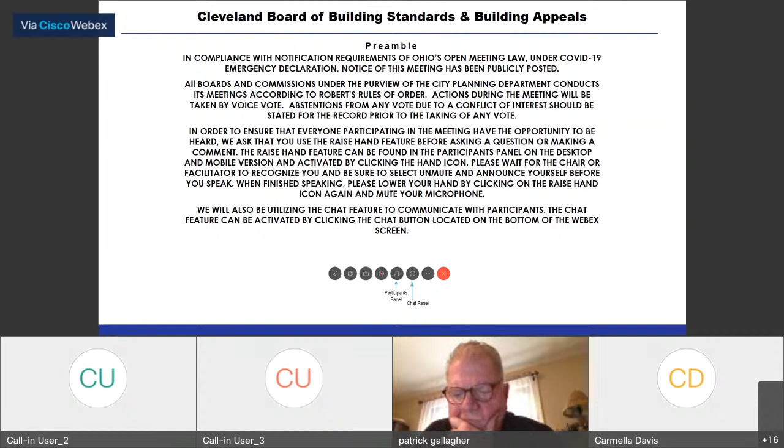Councilman, the very first docket is for the property located at 14620 Lakeshore. Maurice is still working on trying to get those pictures sent through. Yeah, nothing's come through yet. Okay, I put it.

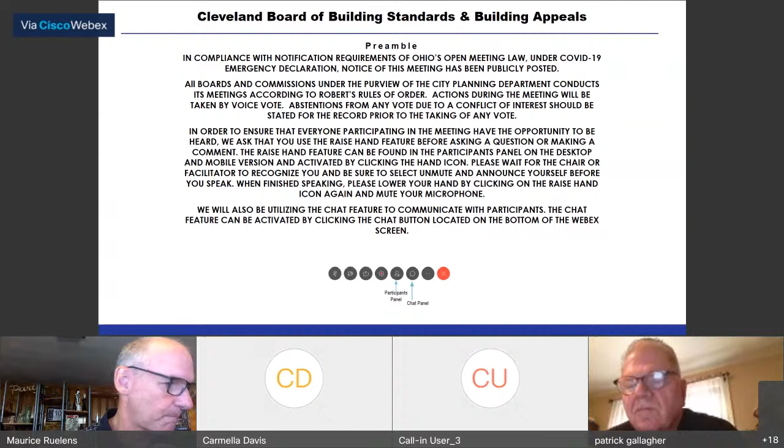James Dorn for Christiana Elridge. And what is your relationship? That's docket A1221. What's your relationship? I'm the attorney for Christiana Elridge. Okay, thank you.

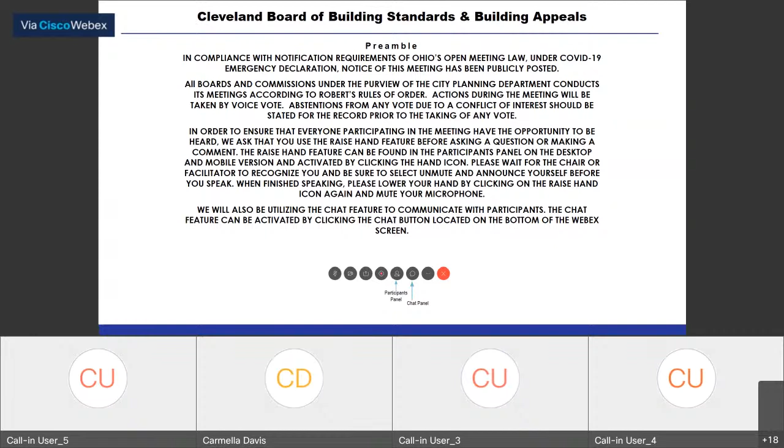And was the councilman the other call-in user? Carmella, this is Lieutenant Alexiak of Cleveland Fire. I'm not calling in, but I'm sharing the screen with Inspector McGowan from Cleveland Fire. Okay, but none of you guys called in on the phone, correct? Correct. All right, so I have one more call-in user that has not identified themselves.

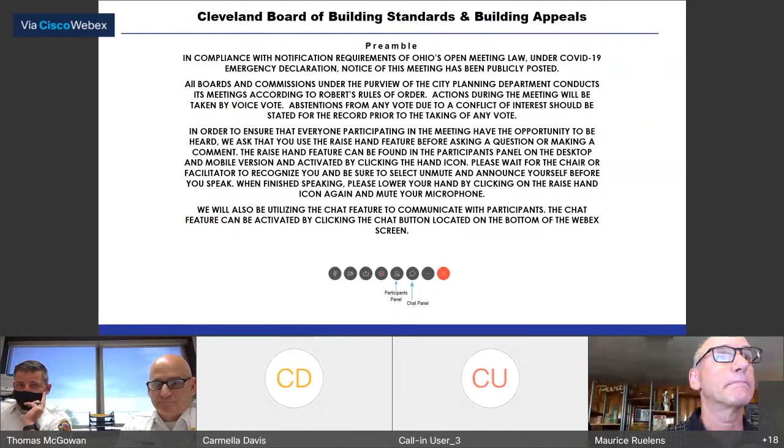That could be Mr. Gallagher. We can go ahead and start, we have all the parties here. Maurice, have you received the PowerPoint presentation or the pictures yet? Not yet, I haven't received the email from him as well. We can start.

Okay, Councilman can comment. We do have pictures for the property as well, submitted by Building and Housing.

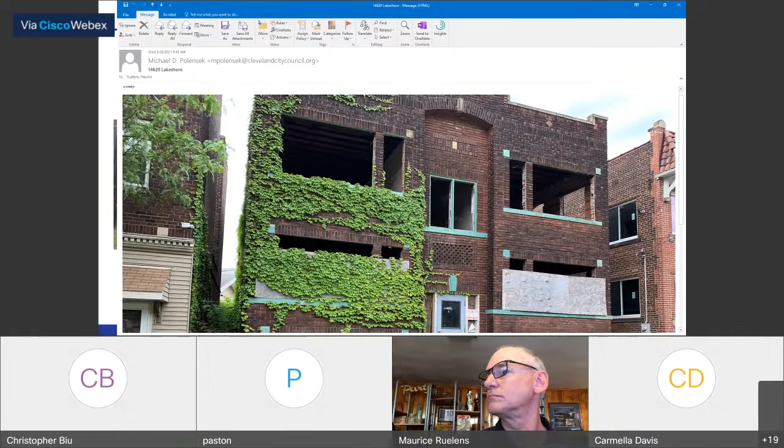This is Patty. Can I ask what that business name is? G3 Management Group, LLC. Thank you. And I also see Anissa Short. Can you unmute your mic, please? Yes, I'm here, can you hear me? We can barely hear you.

Ms. Short, can you hear us? Yes, I can. He's going to have to turn up his volume. We can swear him in. Solemnly swear to tell the truth, the whole truth, and nothing but the truth, so help you God? I do. Yes, okay.

Councilman Polensek, do you wish to speak now, at the end, or sometime in between? At the end, I'll wait to hear the appellants. Okay, so let's hear from the appellant. Who's going to speak on the project?

Are you able to hear me clearly? You're very, very low. Very, very low.

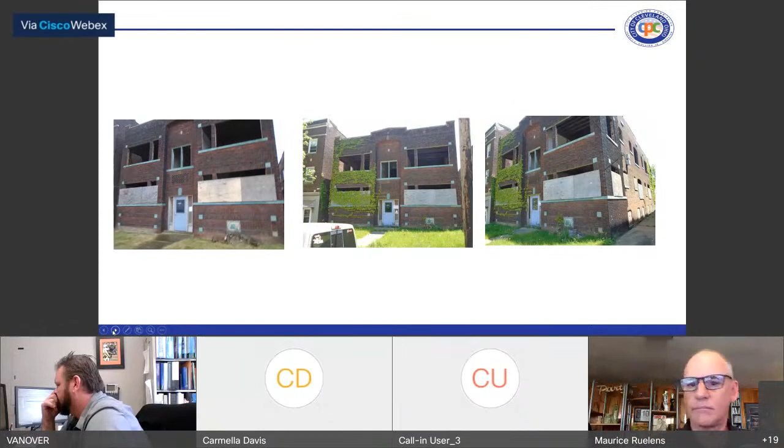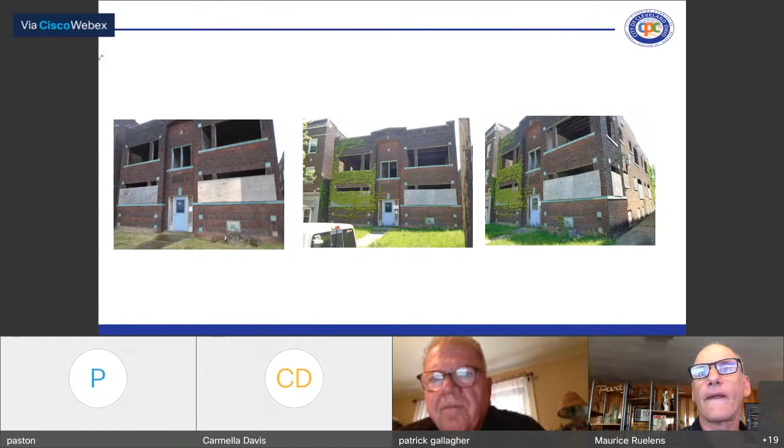We received the violations in February. We purchased the property back in October, I believe we closed. At the time, we didn't have any notice of the violation. We didn't know of any violations. So when we received the violation notice, that's when we started to take action, because we didn't know we had to take any action before then. So right now we're looking for contractors, and we're trying to get the permit pulled, and we're also looking for signs at the moment. So that's what we're planning to do with the property.

I don't know, have any questions? All right, well, we're going to hear from the city, from Mr. Vanover.

Sorry, but we were trying to see if we can request a little bit more time, being that we just found out in February about the violations.

All right, Mr. Vanover. Good morning. So the property was, there was a certificate of disclosure issued as part of this purchase from October 21st of 2020. It indicates on the certificate of disclosure that the property was condemned and when it was condemned. So the purchaser was notified of the condemnation and the violations as part of the purchase.

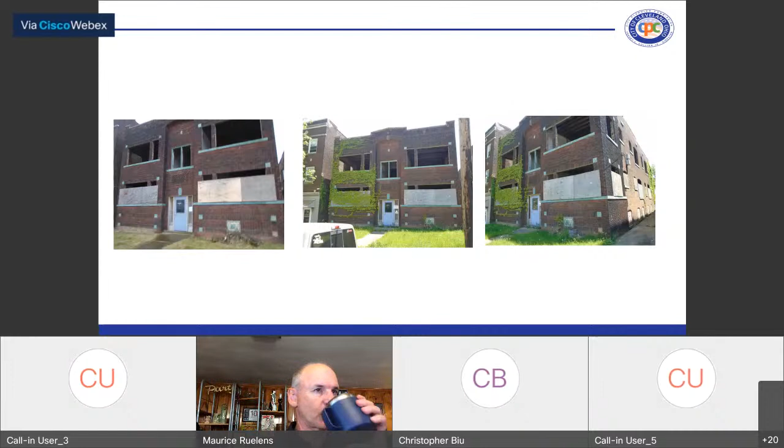Thank you. Mr. Chairman, again to the appellant, do you have the funds to complete this project? Sorry, going to ask you a question, but we didn't receive the certificate of disposition from the title company. We received the certificate of disposition for the first time ever in February. That's the first time us ever seeing anything.

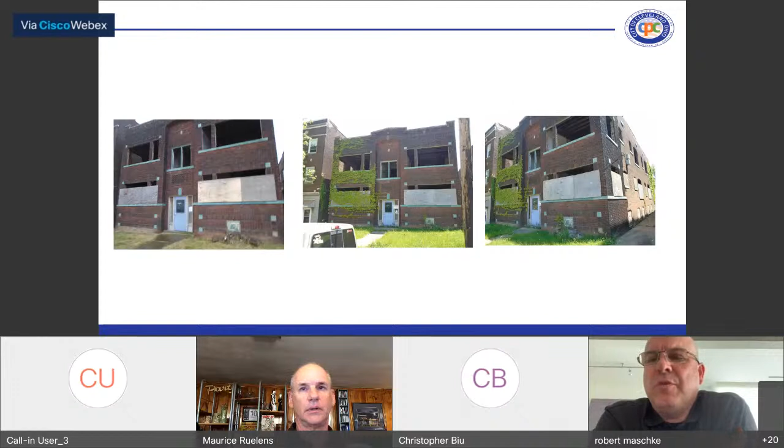That wasn't my question. Do you have the money to do this work? We're looking forward to taking out a loan to complete the work. Okay, based on what I'm hearing, Mr. Chairman, I motion that we remand this to the city. Do not give any more time, and the appellant can work with the city to bring this building out of condemnation.

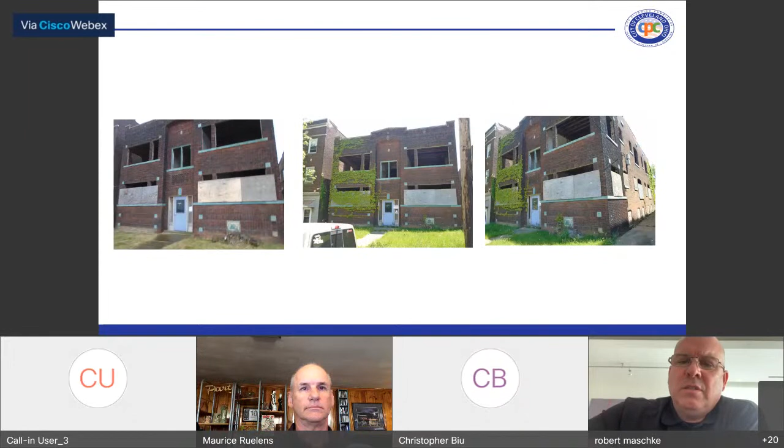Well, okay, I certainly would agree with you. Let's hear from the councilman to see what his view is on this, and then we'll move on with it. Okay, Councilman? Yes, Mr. Chairman and board members and Madam Secretary, and to the appellant as well. This has been a property that has been a cancer on our community. If you see the picture that I sent over this morning, no effort to secure the building.

The grass has not been cut. The backyard is a jungle. I mean, total disrespect for the neighbor. This is on Lakeshore Boulevard, a prominent street in our community. This is a great neighborhood.

We have complained about this building for I don't know how long. That building, if you can see the pictures that I sent over to Maurice, that building has been wide open to the elements like it is for years. That building has been in that condition for years.

But so the appellant buys the building, and again, I concur, there was a certificate of disposition, and what he should be doing is going after the title company or his real estate company if he felt that he had been misled or given false information.

But I'm sick of looking at this mess. The neighborhood's sick of it, and he can't even cut the freaking grass. The grass, look at how high the grass is. No effort at all to maintain this structure. Outrageous. I'm moving. I'm going to do everything I can to get this building torn down. I'm sick of looking at it.

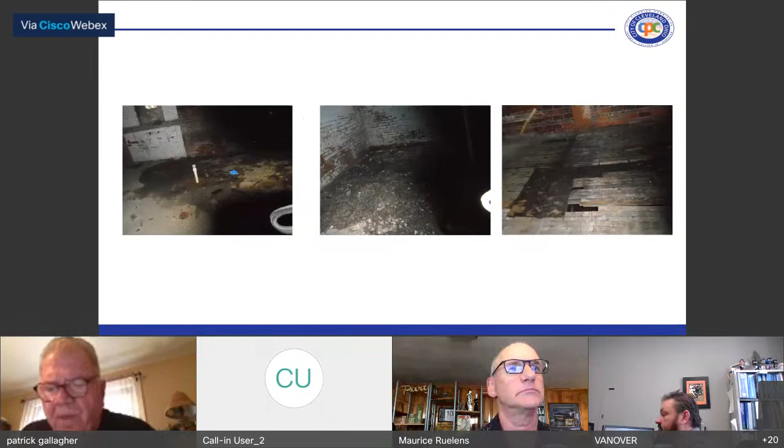Yeah, Mr. Vanover. So, Mr. Chairman, to the appellant, I understand that, and I understand being new to real estate. This is a substantial structure, and my counsel's probably this is not the best one to have started with, or been in your first group of properties. That being said, I've asked twice and still haven't received an answer of how much time is actually being requested.

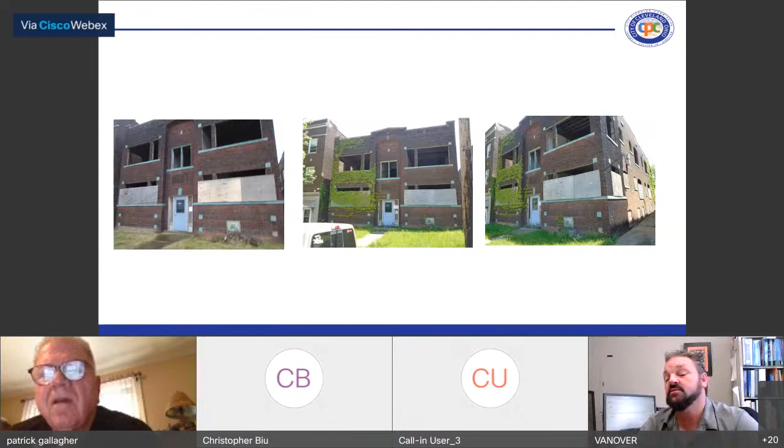Mr. Chairman, to the city, my concern is if this is their first property, this is a very difficult property to turn around if you've never done a project before. And I would be concerned that there has not been an initiative to bring on a professional to help them with documents and submittals, or to coordinate any construction at this point. I have a feeling if we do not remand this back and they work directly with strong oversight from the city, they're going to be back on our docket in 60 days asking for more time.

I totally agree. Mr. Maschke, go ahead and make the motion. One second, Mr. Chairman. Oh, yeah, we do have Ms. Short. I'm sorry. And also Ms. Aston. Okay. Ms. Short. I'm hoping we can hear her.

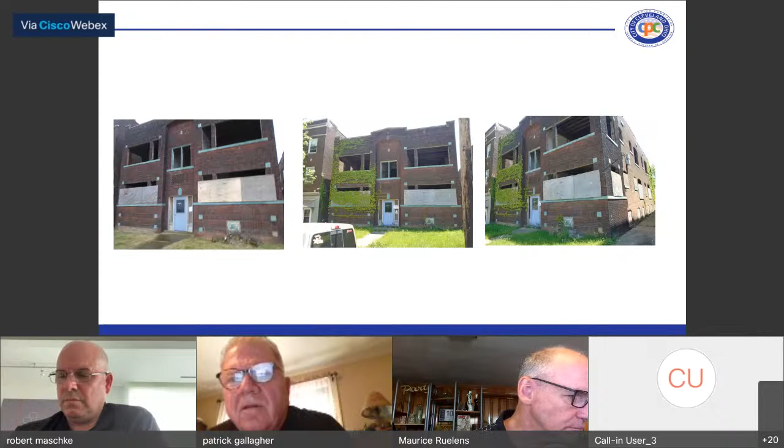Is she still there? Yes, can you hear me? Yes. Is that much better? Yes.

All right, awesome. Like my colleague stated, we apologize for not staying on top of the building. However, we received this information later, not knowing we were under this time strain, and that it was such an eyesore for the community. We called around and contacted people about making repairs and pulling permits, but we didn't know the steps. So we thought this would be the first place to start, as opposed to going forward and doing so much before getting an answer from you guys.

Because when we received the documentation stating it had so many violations and said we had 30 days, this is why we started here. I would like to know, if you remanded it to the city, what is the process after that? What do we need to do, and how would they be helping us with this process? That's basically what we're asking for, assistance.

Okay, Ms. Short. Yes, of course the city would work with you. You can submit to them the drawings and the things that Mr. Maschke had mentioned in the beginning. And so you can proceed. It doesn't stop you from proceeding, but it tells you that you're going to have to work with them and make progress and turn everything into them in order to proceed.

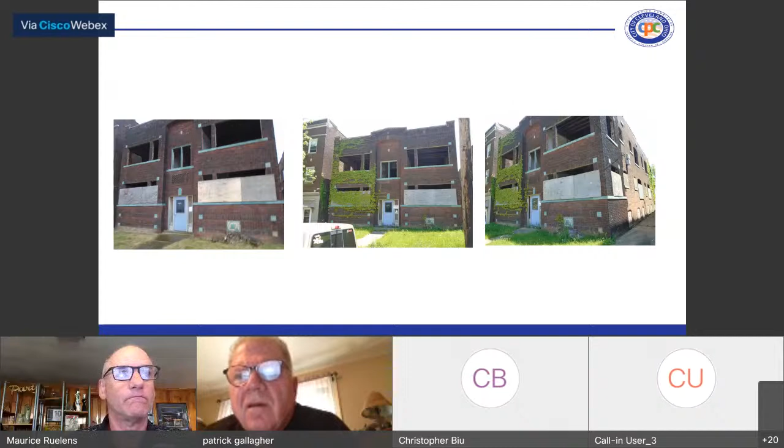Okay, Mr. Biu? You're muted, sir. I didn't have my hand raised. That was... sorry. Still muted.

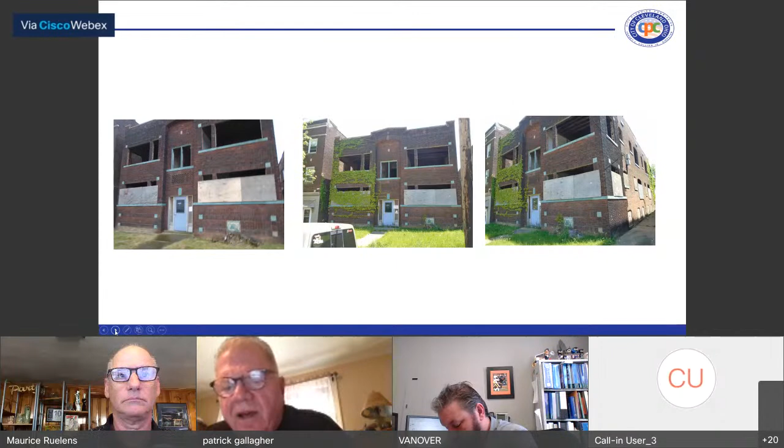So at this point, Mr. Chairman, I would ask that the board make a motion. Okay, all right, made a motion. Okay, we got a motion out there to remand it back to the city. Mr. Bradley? Yes. Okay, so we got a motion and a second. You want to call the roll?

The motion is to remand the property. Correct. Motion by Mr. Maschke, second by Mr. Bradley. Mr. Maschke, yes. Mr. Bradley, yes. Mr. Gallagher, yes. Okay.

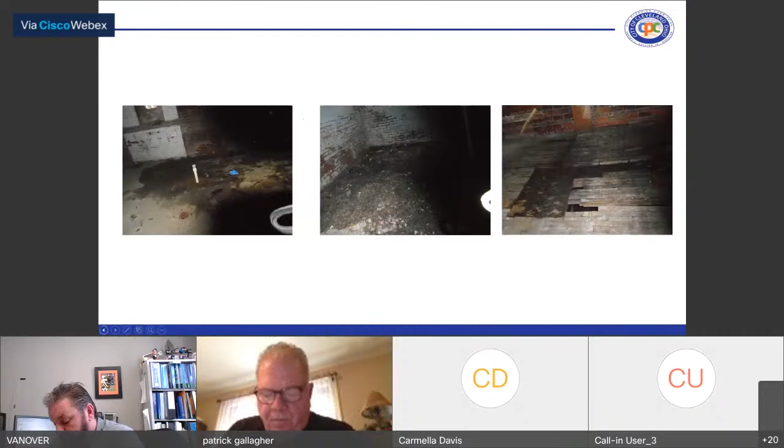Okay, we call the next docket, A921-5103 Gifford Avenue. Application and fees are in order. Notice of violation is exterior maintenance, issued December 16, 2020. Appeal statement received February 24th, 2021, asking until April of 2021 to abate the violations. For the hearing, Tom Vanover, Building and Housing, Patricia Ashton, Law.

With the appellants, for the owner for this property, please state your name for the record. We have a Therese with her hand raised. Yes, I do. Teresa Manos. Okay, let me go over to where you're at. There you are. Okay, we're gonna go ahead and swear you in now. Solemnly swear to tell the truth, the whole truth, and nothing but the truth, so help you God? I do, I do.

Okay, we'll go ahead, give us what you're planning on doing. We have hired a company. I'm still waiting to find out when they're gonna put us on the docket. So he hasn't gotten back to me yet. We're gonna repair the driveway.

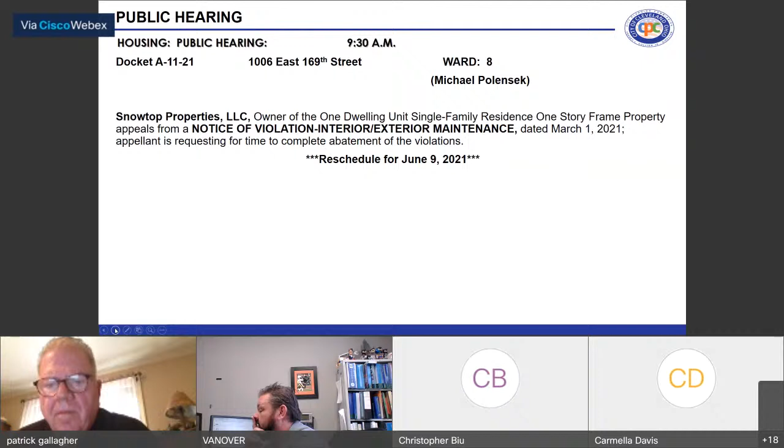Okay, you're all set. I get to go? Yes, you're good. Oh, okay, thank you. Excuse me, guys, I had a question. Pardon? I had a question regarding the decision for Lakeshore. The property being remanded, does that allow us to have time to get the available permits needed? You'll be getting a notice in the mail, yes. Excuse me? Nothing prohibits you from getting your permits. Okay, so we still have to make the changes. Okay, thank you. Have a good day.

With the appellants, please state your name for the record. Christiana Elridge, owner. Okay, solemnly swear to tell the truth, the whole truth, and nothing but the truth, so help you God? I do, I do. Okay, let's hear from the appellant and find out, Ms. Eldridge, what your plans are. James Dorrance here also as well, the attorney for Christiana Elridge. Okay. Who's going to speak?

I could start. This property has been the subject of foreclosure litigation, and we were in the process of attempting to do a short sale, and there was a buyer. However, that short sale did fall through as a result of some closing costs and approval of closing costs. After that, we did receive the notice in regards to the violations and the nuisance. We requested time to be able to go through and look into repairing or correcting the issues. Correcting the issues would have been financially prohibitive.

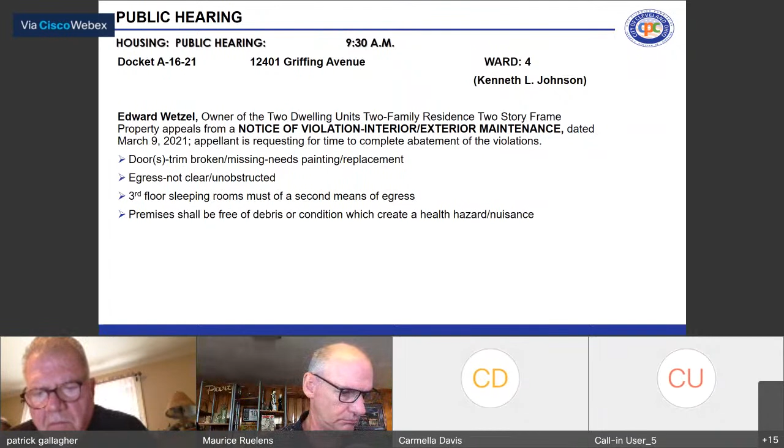Okay, there's someone that just joined the meeting. I'm not sure, I don't recognize the name. Mr. Chairman, we have Carmela with her hand raised. Go ahead, Carmella. Mr. Chairman, to Mr. Vanover, review your inspector's report, because from Mr. Davis' report, he said that they were in compliance. So maybe that's why the appellant is not here.

Bear with me a moment, I'm actually looking at the last... I'm having trouble bringing it up. I'm having my own technical difficulties. That being said, if they are in compliance, then remanding it to the Department of Building and Housing has no risk. Sounds good. So we would ask that if you remand it back to the Department of Building and Housing and they are in full compliance, then we'll just close the violation notice and move forward.

Because they did not withdraw, is that correct, Ms. Davis? That is correct. He has not reached out to me and said he withdrew his appeal. Okay, all right, Mr. Maschke? Move. Okay, it's been remanded. Is there a second, Mr. Bradley? A second. Okay, so it's been moved and seconded to remand the property back to the city.

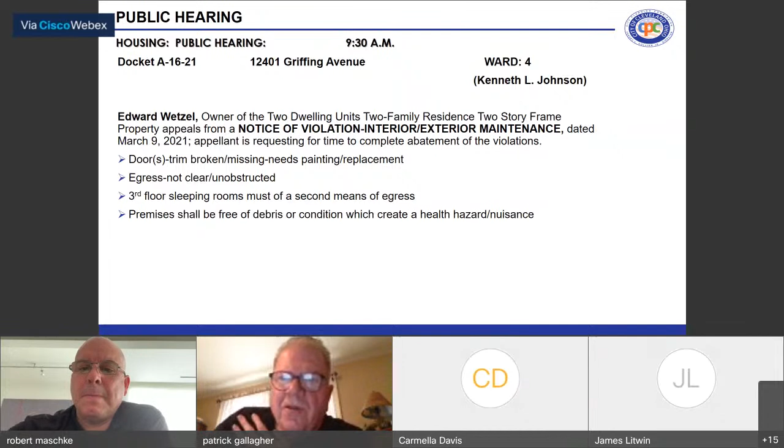Okay, so we're going on to the time extension. Docket A1421, 1552 Ansel Road. Application and fees are in order. Notice of violation is a condemnation of the main structure, issued on December 17, 2019. This is a time extension request.

We first heard this docket on September 30th, 2020, under docket A 1420. The motion at that time was to grant the appellant until May 1st, 2021 to abate all violations. Present for the hearing, Tom Vanover, Building and Housing, Patricia Ashton, Law. Would the appellant or the appellant's lawyer please state your name for the record?

Yes, good morning. Dennis Nevar, attorney on behalf of Vesta Lynette LLC. Also with me today to provide testimony is Mr. Lewis Brown with the appellant. Good morning.

Solemnly swear to tell the whole truth, nothing but the truth, so help you God. I do. Yes. Okay, so go ahead, let's hear from the appellant, whoever is going to speak. It's going to be Mr. Brown or Mr. Nevar.

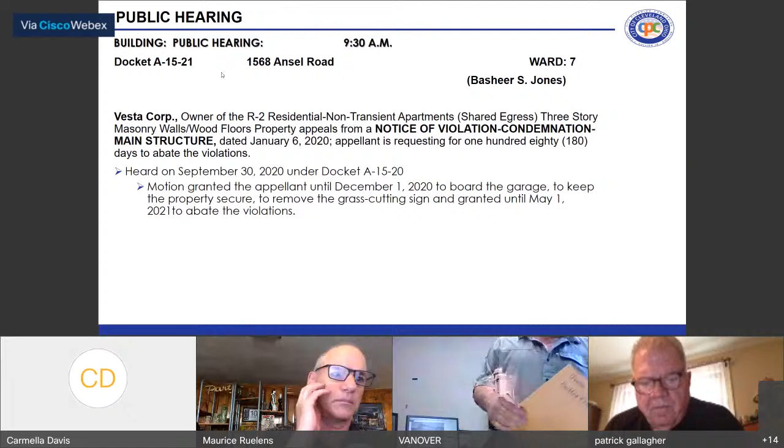Okay, call the roll. Mr. Maschke, yes. Mr. Bradley, yes. Mr. Gallagher, yes. This is Patty - just to clarify, you mean 2021, sir? Yes, absolutely, 2021.

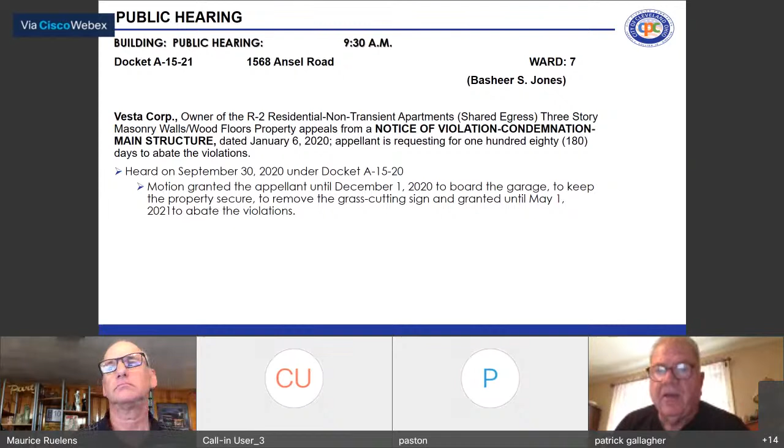That's our attorney, dotting the i's and crossing the t's. All right, sounds good, so we're all set there. Now actually, that was for both properties. We didn't open the other one, so we're gonna need to do that quickly and include that in - Docket A1521, 1568 Ansel Road.

Application and fees are in order. Notice of violation is a condemnation of the main structure issued January 6, 2020. This is a time extension. We originally heard this docket back on September 30, 2020. The motion was granted to give the appellant until May 1st, 2021 to complete abatement of the violations.

Present for the hearing, Tom Vanover, Building and Housing, and Patricia Ashton, Law. With the appellants for the property, please state your name for the record. Yes, good morning, Dennis Nevar, attorney on behalf of Vesta Corp, 1568 Ansel Road. Also with me today is Mr. Lewis Brown, who can answer any additional questions on this property, which were, I think, thoroughly addressed in the last A1421 docket number. We request, consistent with A1421, the July 31st, 2021 date for the demolition permit and the September 30th, 2021 abatement date.

Okay, so thank you - you're all sworn in from the first case. I'll just say it again: solemnly swear to tell the truth, the whole truth, so help you God, and that includes everything you just said. Okay, and Mr. Vanover, inclusive.

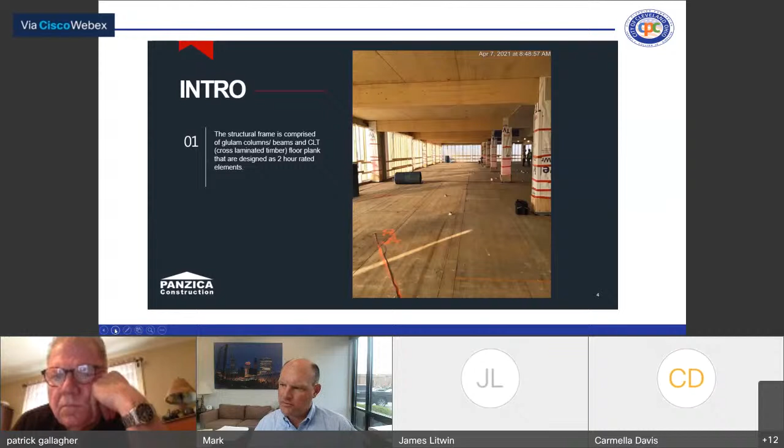Each location has 2 cameras inside its unit that can be pointed in a direction to capture the most view coming in to detect any type of intruder or movement during off working hours. These units are monitored full-time by security specialists in a remote location. When a detection does go off, an alarm sounds that deters the intruder, and then a call is made to the police department in the event that the intruder doesn't leave.

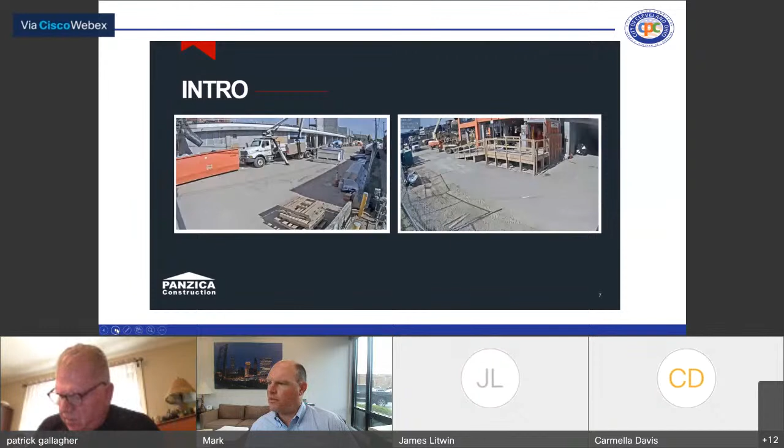Next slide, please. And then this is another example of another location. So based on where we see possible intrusion threats, we have put these cameras in locations to detect any type of off-hours intrusion. We feel that the ProVigil system, which has been approved by our builder's risk carrier and was actually a requirement, meets the intent of the NFPA code for site security during off working hours.

James, do you have anything else you'd like to add? Yeah, thanks for that, Mark. I guess a couple important things to point out from our standpoint is level 1 is non-combustible, so we have a podium situation. Mark had noted this is not a light frame building, so it's new, I'm sure, to everybody here locally.

So new, in fact, that on the builder's risk side of the equation, I think we were somewhere in the neighborhood of 7 times the estimated cost of a traditional policy. They reviewed it extensively, the insurer, and dictated what we should do in terms of protecting the building.

In addition to that, I know that Panzica has added doors to the bottom, stairways, so access to the second floor, while certainly not impossible to access, to get there would take a little bit more time. So the combination of the camera picking up the activity at the perimeter, which is very effective, and the slowdown at the stair entry points would certainly give us plenty of time to respond if we had any issues.

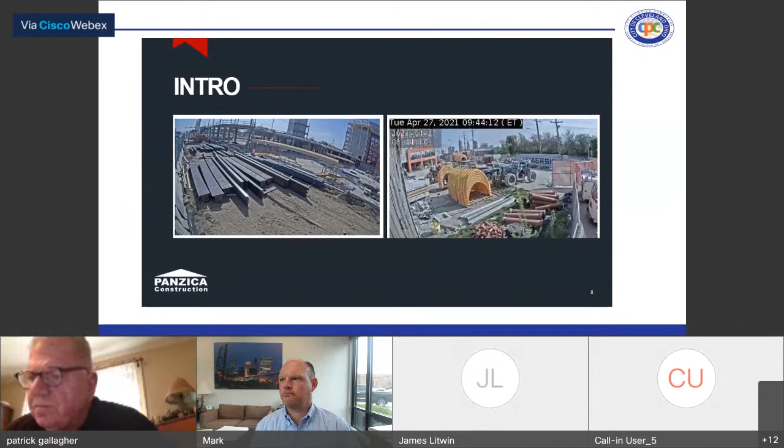Okay, any other comments from the contractor or owner? We have Miss Aston. Okay, Miss Aston, go ahead. Thank you. Just briefly before anything from either Mr. Vanover or the fire department, there were comments regarding quote unquote 'monitor full time.' I'd just like clarification. What does full time mean? Is that full time when? If it wasn't a 24/7 statement, that's why I'm asking for clarification.

Thank you. Yes, the monitoring happens during off working hours. We set those times with the monitoring company. We're generally working from 6:30 a.m., 7 a.m. until 5 p.m. So the monitoring service kicks on during that time, and we adjust those hours as needed if we have people working longer hours. For example, we've amended the surveillance over the holiday weekend to include the holiday on Monday. It's part of the service that this company does.

So I guess thank you, Mr. Chairman. Does that mean when you are not actively working, it's always monitored? Is that a fair statement? Yes, that would be correct. And we have an apartment block off the project, and I could attest, I've received several calls from neighbors with the alarm going off, and I can hear it myself. So anytime they're not on site, the building is alarmed.

Okay, and you're saying it's monitored, which means someone is actually watching the site. Is that correct? Oh, yes, that is correct. It's not just signals, but there is actually someone looking at it. Okay, that's all right. Mark, if you could add to this, but they have monitor screens. They look at it, and there's a series of phone calls that get made to people that are on a chain of command, if you will. They have an intruder, they look at the intruder, they assess the situation, and they make phone calls. It happens on a fairly regular basis, actually.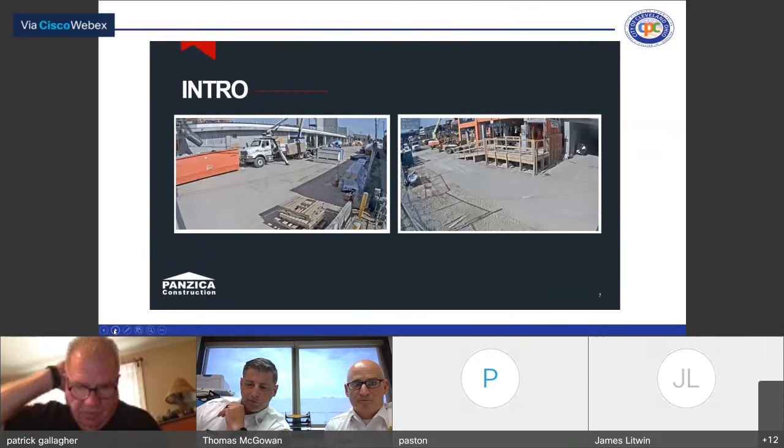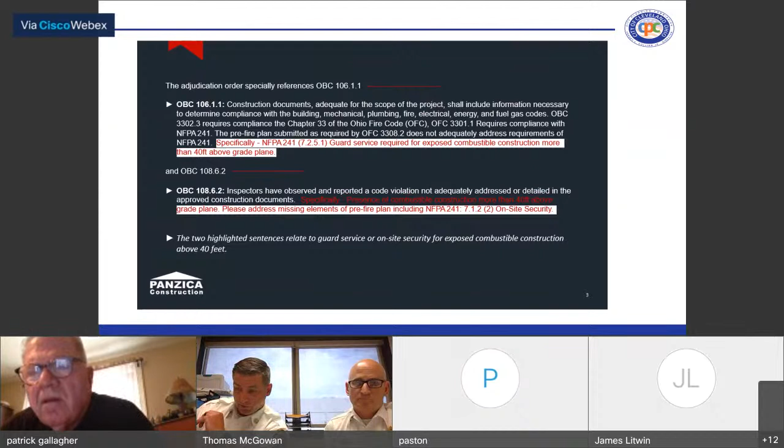Correct, it's explained further in the next section. I'll read that. NFPA 241 7.2.5.2: Where guard service is provided, the guard shall be trained in all the following: notification procedures that include calling the fire department and management personnel, function and operation of fire protection equipment, familiarization with the fire hazards, use of construction elevators where provided. There's also in the explanatory notes for that section an NFPA standard, 601, that defines the role of guard service.

Very good. Okay, we'll go back to, is it Mr. Litwin that was giving us the information? Yeah, well, it's both Mark and I, a couple things. We have certainly been very open with our communication with PD.

In fact, when we started digging a hole in the ground, we brought them on board. So if there's any information that the fire department is not getting, it certainly isn't from our desire not to engage. That being said, as I look at all the sections being quoted, I think the fire department pointed out a very important point, which is this is a new type of construction. It is not anticipated in the sections of the code that are being referenced.

For instance, the flame spread rate of a mass timber building is dramatically different than a stick frame building. This code is specifically looking at stick frame building. So as far as firefighting goes, the acceleration of a fire in a mass timber building, again, is dramatically different than a stick frame building. So I appreciate the code, but it is also far behind the curve of projects now being developed using mass timber. And I suspect there'll be some changes in this.

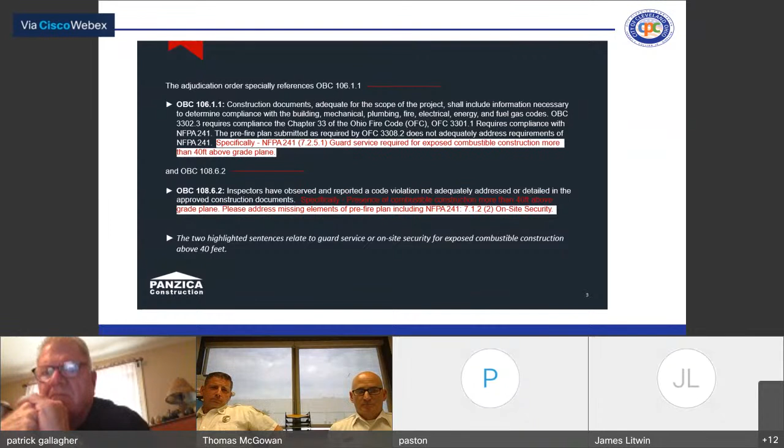There is nobody more interested in keeping this building safe than we are. We don't want to see an incident. If it's a matter of cameras and vantage points, we could put cameras on every single floor of this building and have coverage that would far exceed the coverage of a single person walking the project. We are ready, willing, and able to do just that, because we believe, as all the insurance companies insuring these buildings do, that this process of security is superior to a single person walking a job of this size with this number of floors. You simply cannot cover the building the way the cameras can.

Mark, I don't know if you've got anything to add to that. I was just going to say, we've had a great relationship with Cleveland Fire, and we want to keep that open communication going. So if there's anything we could do to work collaboratively to address the concern using, like James just said, additional cameras or other types of electronic monitoring, we feel the technology base of that could be superior given the fact that human nature has its faults as well. We think there are plausible solutions, and we welcome and invite that conversation to keep happening so we can refine the best way for this building, given that it's a new type of construction in the United States.

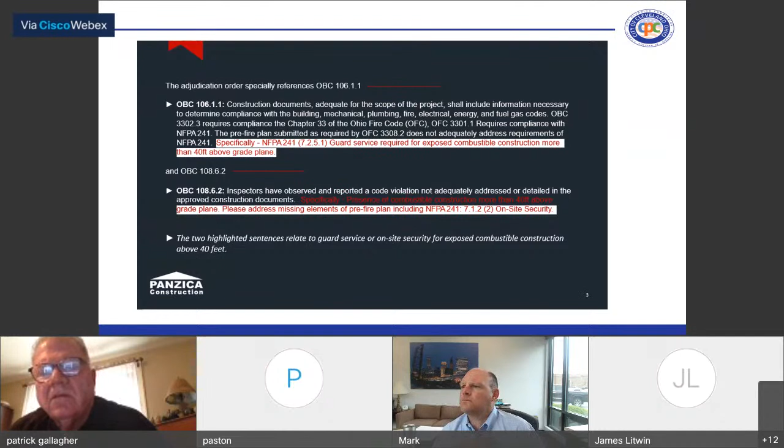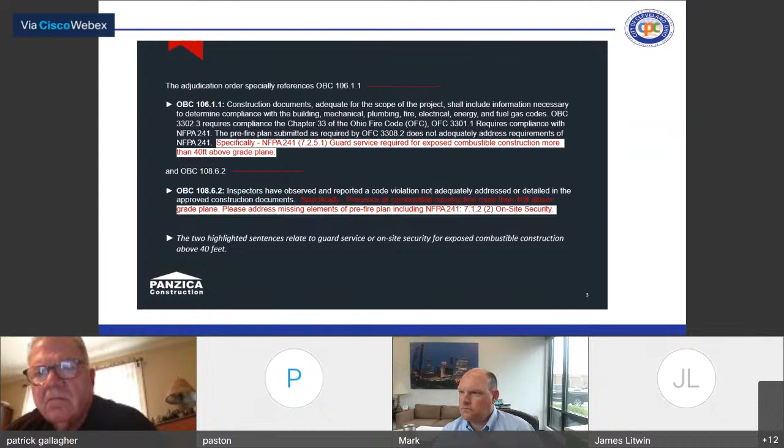Mr. Chairman, this is Patty, if I may, a real quick question to the appellant, Mr. Panzica and Mr. Litwin. Can you certify or provide information to verify that whatever company or personnel is being used for the full-time off-hours security meets the training requirements cited in the record under NFPA 241, section 7.2.5?

I can reach out to the security monitoring service and provide their credentialing. They haven't told you specifically that they are certified though, correct? Or trained? It's not certified, I'm sorry, the code requires training. Correct. Their process is using artificial intelligence recognition, and that's their specialty, to recognize threats that are coming in, and that is in their literature.

I just want to stress the fire's concern over vertical versus horizontal site security, because one of the items is specific to the use of construction elevators, which is not remotely capable, and obviously the code may be behind what the appellant requires, but it's still the code that applies to this project. One concern is not just vandals, but other emergencies that might happen at the property, including accessing vertical areas above through those elevators in an immediate situation, as opposed to the delay required. This board has every right through its variance powers to do so, but fire has articulated important reasons why this security is more than just calling the police.

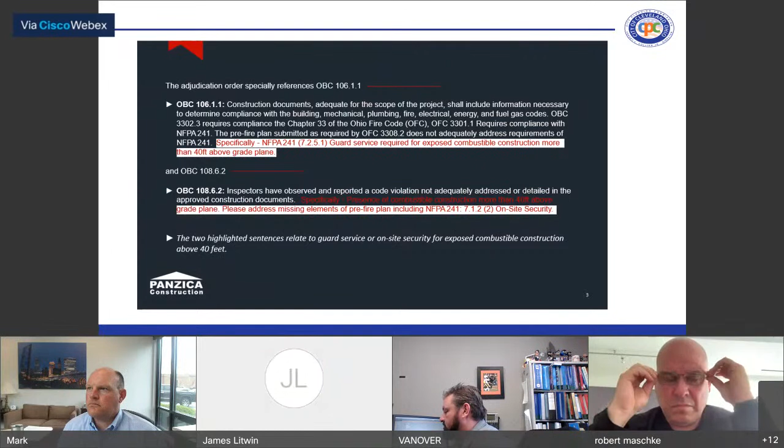So from my vantage point, that's a good thing for the city to adopt in general, because there will be more of these projects, and there must be a reason. I've spoken to an agent that sent me a very large bill for this project, but I'm sure there's a dialogue and a purpose and a reason why they went to video monitoring above and beyond everything else. So that's the only comment I have. Looking to the future, we certainly are going to be adding cameras to our protocol.

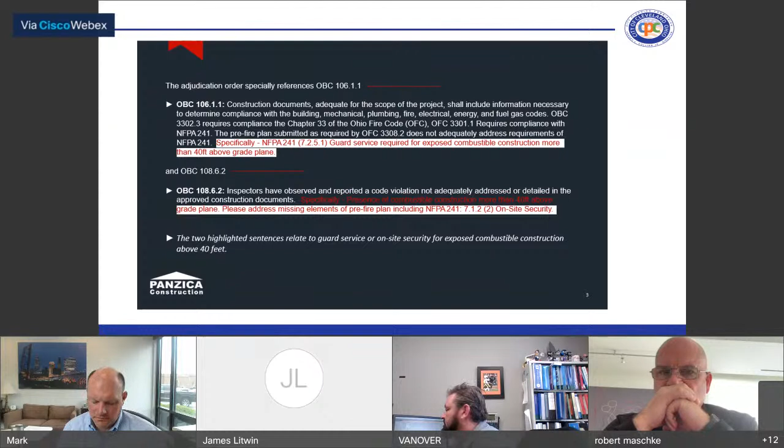Okay, sounds good. Going back to what Mr. Maschke's question was to fire, what do you guys feel you can live with? Yeah, to what Mr. Maschke was saying, what's common is a manned guard.

That's actually common, speaking with contacts from San Antonio to New York to Florida to Georgia, as well as other parts of Ohio, for projects of this scope utilizing combustible construction.

And again, I mentioned earlier, I don't debate at all the merits of a security system, and I think Mr. Litwin and Mr. Panzica's points on the benefits of the security cameras, I don't debate that at all, and I agree with it. I also agree with the insurance industry's assessment of cameras on a site. However, I'd like to note for the record that in speaking with insurance industry individuals on my side, they've always recommended it as an aid, not as a replacement. Cameras can see, cameras can't smell or hear.

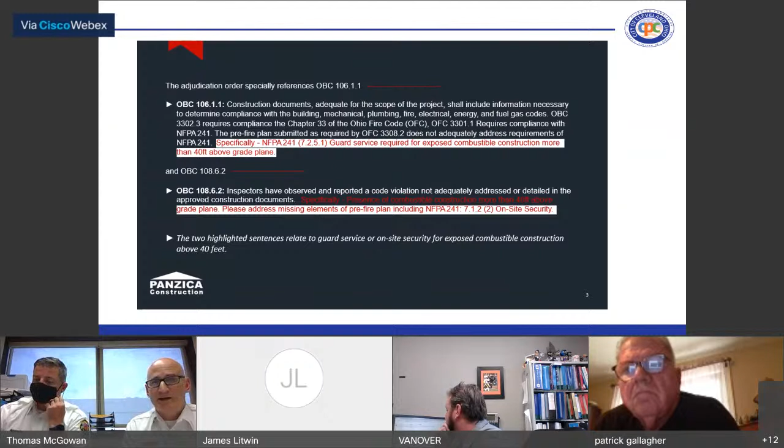And they can't feel heat either. So, again, to the point I made previously, security is one of 5 elements called out in NFPA 241. So we have that part covered, no doubt about it. That's not debated at all. I'm glad it's there. Panzica is actually a great contractor, I'm glad they're building in our city, I want them to keep building. They have some of the best managed job sites that I've witnessed as an inspector.

But in this case, what's unusual is we have combustible construction that has gone above 40 feet in height. We have a high rise that's going up, and that is unusual. On that point, I don't think we're out of line at all. Matter of fact, what we worked out is we're not requiring manned security from day one, we're requiring it just once it gets above 40 feet in height. And we had been working with Panzica, as Inspector McGowan called out, I believe it was March of last year.

We were making regular visits to the site, bringing forward copies of Chapter 33 out of the Ohio Fire Code to ensure they were getting exposed to it early on, because we knew there were going to be variables as the project developed. We don't debate the merits of security as an aid.

To the point, you're relying on response from the Cleveland Police Department or the fire department. You don't have somebody on scene that knows how to take the buck hoist up, or anyone on scene that knows the exact status of the firefighting equipment. Right now is a dry standpipe. What floor is it on in stairway B? What floor is it on stairway A? We don't have that on site right now while the building is being built.

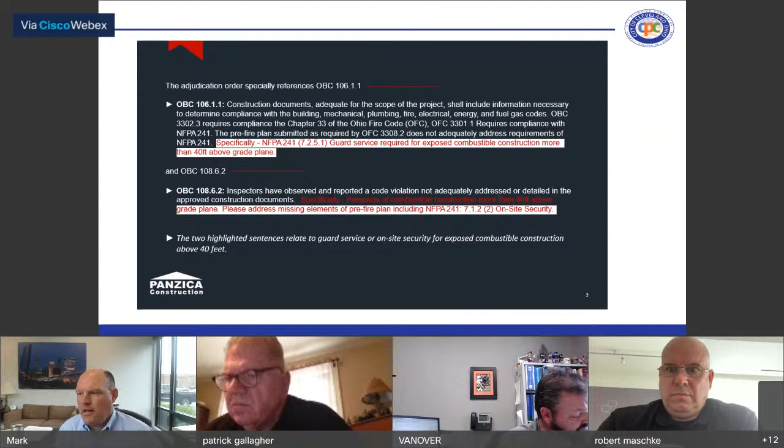Can I comment back to that? Yes, it is not a small amount of time. If you think about an 8-hour workday versus the other 16 hours they're not working, and then weekends, it's a lot of time. It's not a small task.

And to our comment back about the elevator — the guard service is not trained in operating the buck hoist, which is the elevator on the outside. You have to have a special certification for that. So there is no operation of the elevator during off working hours, just for points of clarification.

Mr. Chairman, I have two points to make because I issued the plan approval for this project. First, I disagree that the fire load in this structure and the fire load in the California building fire, the LA fire, are the same. They are not. Fire load is based on many things, not just an amount of wood.

I would also be hesitant to say that nowhere in the United States have they built a cross-laminated timber or heavy timber building more than 40 feet. The code currently allows a non-sprinklered R-use to be 65 feet, and sprinklered heavy timber construction type allows 85 feet. So I don't know of all the times this construction type was used. I know it's not common, but I'm not willing to concede it hasn't been done in this country.

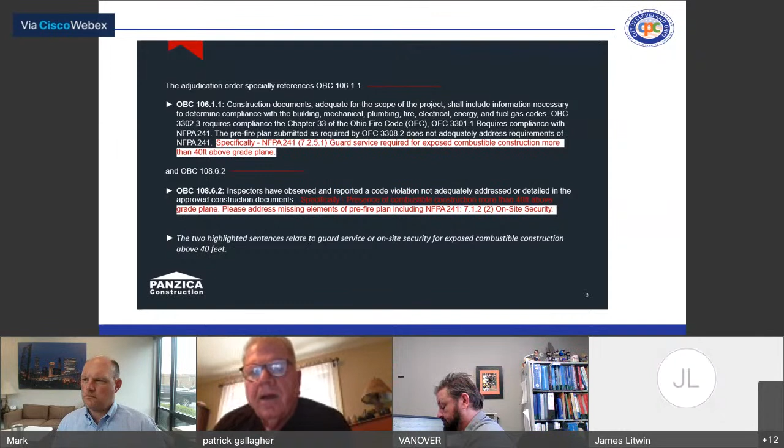Now I have to ask a question: what happens if you have a guard inside? Is the monitoring system going to keep going off, or are you going to turn the monitoring system on? Yeah, that's a great point. You can't have it on, because the monitoring system is looking for motion.

So thank you for pointing that out, that's a very important point. You cannot do both. So basically, you're going to shut off a system that can see every floor from every angle, and replace it with an individual who, if they happen to be on the 9th floor, isn't seeing what's going on the first floor. Mr. Chairman, based on that, I think it compromises the system, and I may change my opinion, because one person cannot cover a building as much as the sensors can.

Can you clarify for the record what sensors are in place? Right now we have 8 camera views in place around the perimeter of the site. So are those sensors or cameras? They're cameras. So we don't have sensors on the building site, we have visual cameras only, correct? As of right now, that is correct. Okay, and as fire stated before, that is an excellent aid in addition to manned security for combustible construction above 40 feet.

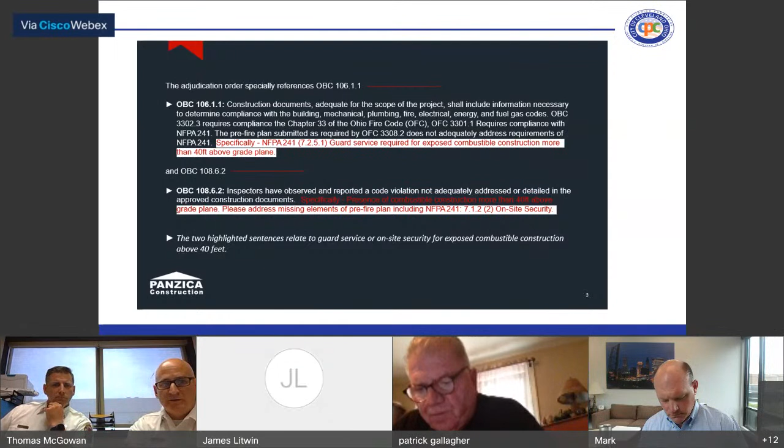Might I suggest we take the opportunity, maybe this is where Mr. Maschke was going, to explore what other camera views or electronic detection methods could supplement the cameras so the concerns are addressed by fire. Fire would say, if you're talking about fire protection, fire alarm, or make the dry standpipe system a wet standpipe so water can get there sooner.

Mark, I would add just sprinklers. I would say these are things we have not ordered or required, so it's being asked of us what we're willing to do. Well, I'd say we're being pretty agreeable in that we have not required a temporary fire alarm system to be in place, we have not required a wet standpipe to be in place, and we have not required the sprinklers to be active, as Chapter 33 of the Ohio Fire Code calls out.

This is Patty. Is Mr...

Panzica, are you requesting — were you, in your statement, requesting to talk to fire and then come back to this board, like pause this hearing, or do you want to conclude this today? I was just looking for a compromise solution for this. I don't know what that request looks like.

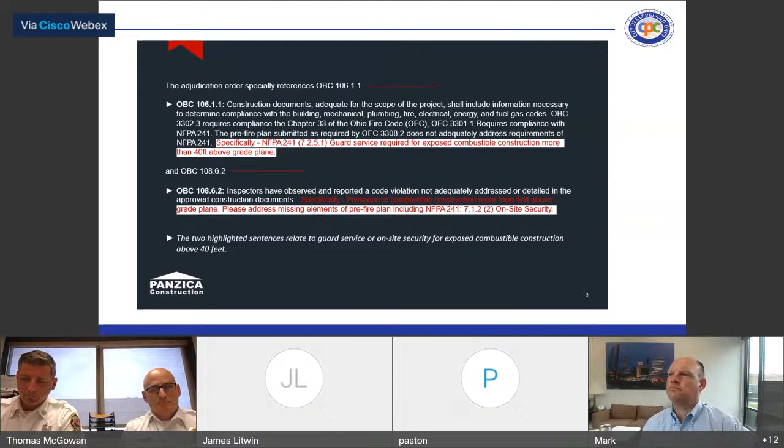Mr. Chairman, perhaps I might add, I think we have to come back to the committee. The point that having a guard on site takes the cameras and views out of commission is going to create a problem for our insurer. It's an absolute requirement on our policy. So I'm going to need time, and I'll act right away to run that by them. Perhaps in the meantime we could do some research on putting smoke detection of some type in place and add additional cameras.

Mr. Chairman, point — it seems that perhaps a continuance of this hearing, where the CBO, Vanover, and Fire can get together with the appellants after some research is done, to discuss possible compromise solutions and then come back to this board, might be appropriate. It's just a matter of whether that's a 2-week or 4-week time frame. Okay, let's check with Carmelo and see what's available.

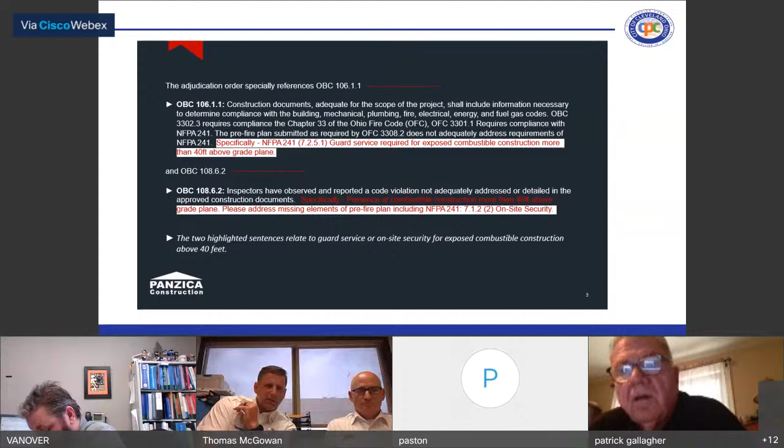I have one question. Are we saying these cameras will be set off when somebody's above the second floor of the building? Is that where the guard would be? The cameras are located along the perimeter at grade level. So if somebody's on, let's say, the third floor and above, patrolling the building, will that set off those cameras? If they stick their head anywhere near a window where movement can be seen, that alarm is going to go off. Above 40 feet?

Yeah, I'll get a diagram on this, but I set the alarm off on the 7th floor last night. I hadn't even thought about it — I got locked in periodically because I'm here after hours. That alarm went off, and there was nobody at the perimeter that I could see anyway.

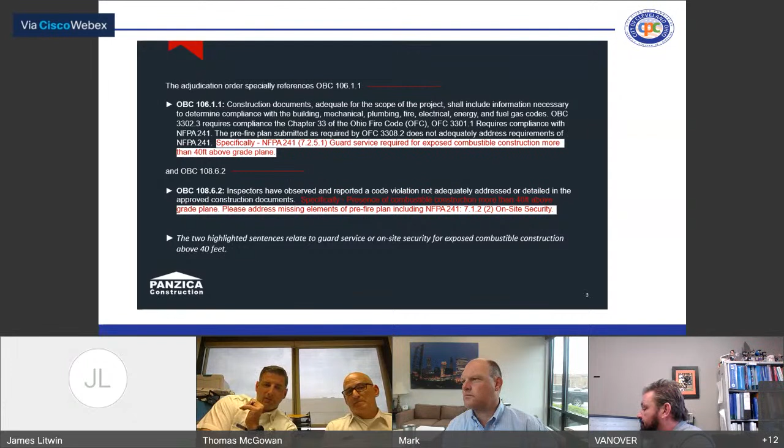Fire, do you have a problem with coming back and discussing this a little further? I don't, if we can put a manned guard in place in the interim. No, I don't think so, Mr. Chairman — on behalf of the city, the appeal stays the enforcement, so they're not going to have a problem regardless, because that's their job, and they have to wait until this board rules.

Okay, so I guess we're gonna hold until — is everybody good with that? We're gonna hold for what, 2 weeks? I concur, I would give them 2 weeks to come back, Mr. Chairman. 2 weeks — will that give you enough time for the interim review?

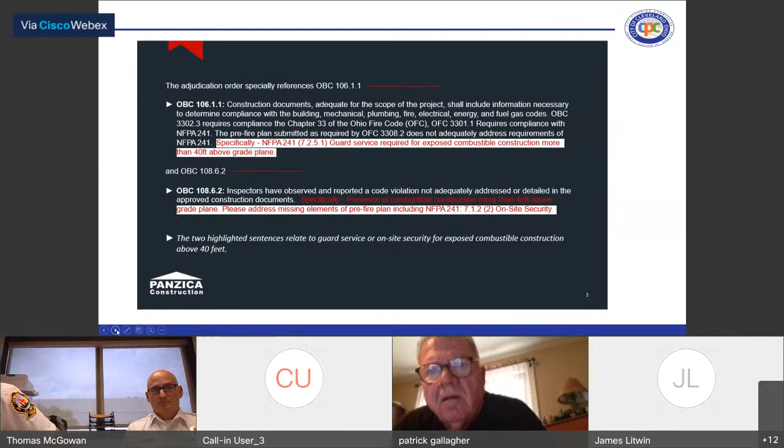Yes, in the interim we will start looking at strategies to add cameras as well, because I actually think that's a very good idea. I've talked to Panzica about adding additional cameras on the floors. In addition, I've got a subcontractor meeting going on right now — I'll talk to my electrical sub to see if there's any way we could add smoke detection.

Okay, well, we're gonna bring it back in 2 weeks. Carmella, will you be able to do that? I can tentatively schedule them for 2 weeks, which would be June 9th, unless I hear from Mr. Panzica that something else has come up and they need more time. Okay, all right, so we'll take no action at this particular time for this case, and we're going to call it back in 2 weeks unless we hear different from you.

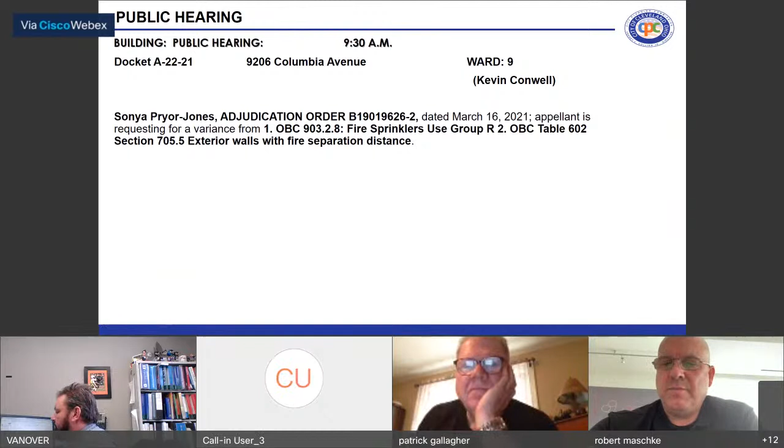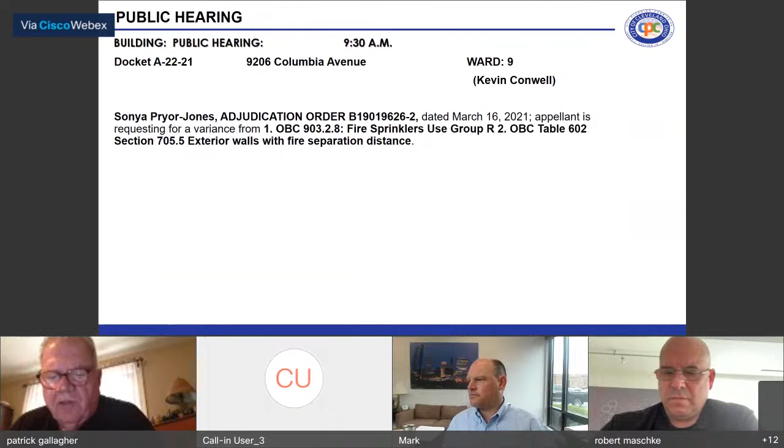A-22-21 9206 Columbia Avenue. Application and fees are in order. This is an adjudication order dated March 16, 2021. The appellant is requesting a variance from OBC 903.2.8 as well as OBC Table 602, Section 705.5. Present for the hearing: Tom Vanover, Building and Housing, and Patricia Ashton, Law.

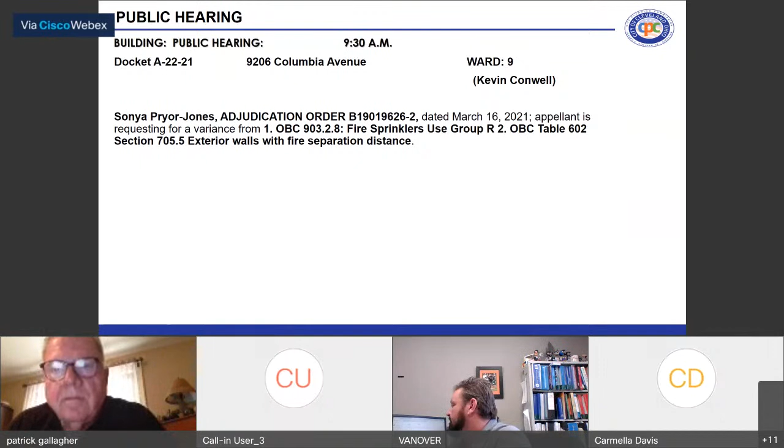Would the appellants please state their name for the record? Hello, my name is Sonya Pryor Jones. Hi, good morning, this is Katie VZ Gillette. Okay, all right, is that all that's going to be speaking? Yes. Okay, all right, do you solemnly swear to tell the whole truth, nothing but the truth, so help you God? Yes, I do.

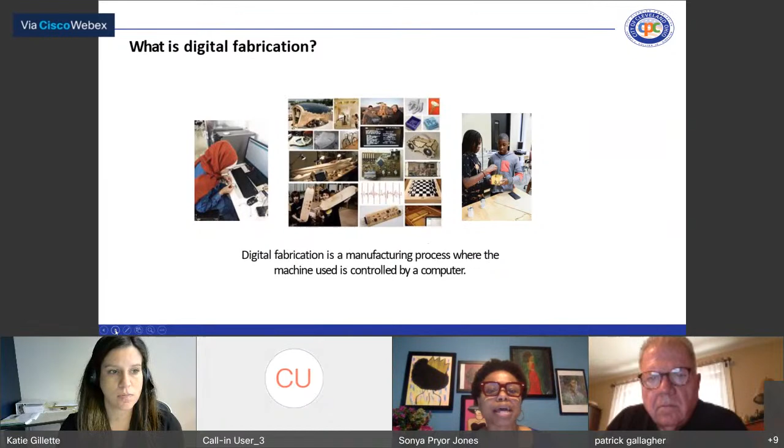And maybe you can forward the slides, please. So this picture gives you a general idea of what a Fab Lab is. If you could go to the next slide.

Our goal is to bring this to the Glenville neighborhood specifically and to support the 20,000 residents with learning this technology and these tools, so that they can support them with workforce training, education, entrepreneurship, and honestly, the love of learning and having a little fun with technology.

If you can go to the slide. To date, we have been working to build capacity in the neighborhood and really partner with several organizations to help us bring the ideas to the neighborhood and start to expose residents.

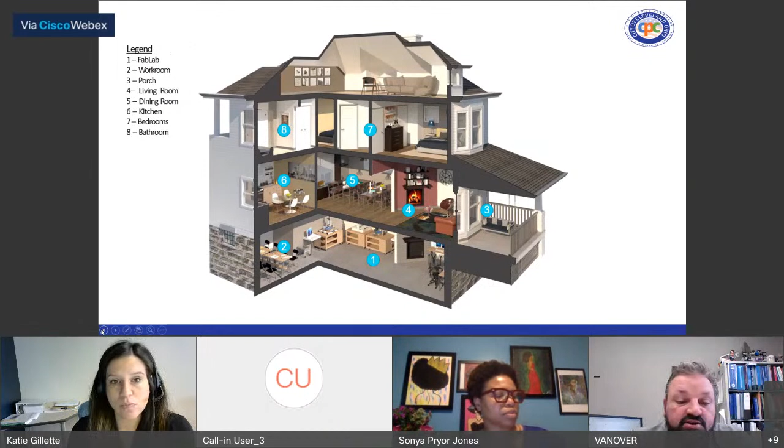This was a single family home. If you could go to the previous slide, Maurice. So if we look at this slide, sections 3 through 8 will be used as they have always been used, as a single family home for the structure. Correct me if my understanding is wrong: you have the porch, the living room, the dining room, the kitchen, the bedrooms, and the bathrooms all going to be used as they have since the house was built.

What changes in this design is areas 1 and 2 are now commercial uses, and I believe they exceed the allowances in the live-work designation because it's not just the residents working in the business spaces. There will also be outside persons, and the public, for lack of a better term, invited in, although it may not just be open to the public.

Persons not living in the home will be accessing the basement, lab, and the workroom. So this becomes a commercial structure that does not comply with the requirement that all uses be sprinklered throughout. What the appellant is looking to do is sprinkler that section with a limited area sprinkler system for the section where they're changing the use, but with no construction happening anywhere else in the building. That is a variance request that is required to go through the board.

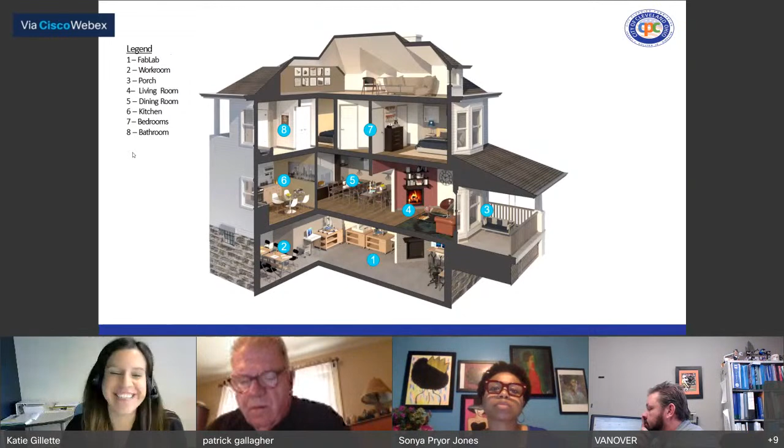Okay, with that heard, let's get to the applicant and see what it is they're actually looking to get a variance on. So we're back to you again, Ms. Jones or Ms. Gillette. Yes, so that took some of my thunder. If you advance to the next slide, it's okay.

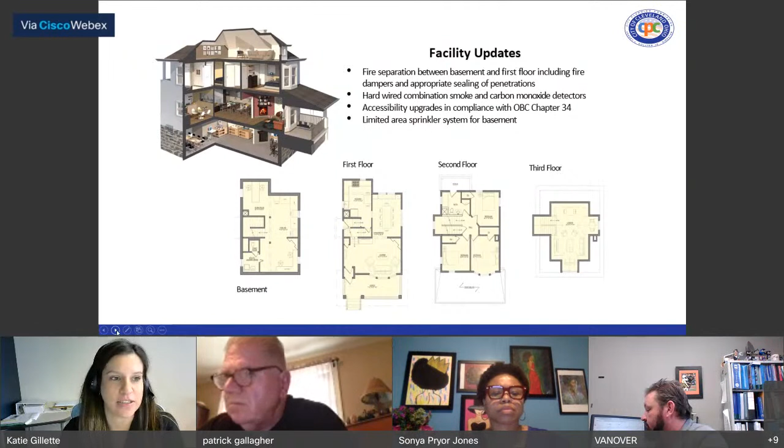The house itself, in its current condition, falls under the Ohio Residential Code currently, but we will be under the OBC, so we will be reclassifying the house as an R2 use group, and also using section 419 of the Ohio Building Code, which is the live-work portion of the code. We're able to navigate a lot of the upgrades required for this facility, but we are seeking a variance to fully sprinkler the home itself.

I will add that as a safety measure, we are going to be separating the basement from the first floor with a one-hour fire separation, which is not required in section 419. That is an additional measure we are taking to offset the need to sprinkler the rest of the home.

A lot of this is being done to balance the cost it will take to bring this facility up to current code. So the fire separation is one of the primary measures we'll be taking to increase the safety of the house itself.

We'll also be adding hardwired smoke detectors and carbon monoxide detectors. There will be some accessibility upgrades in compliance with Chapter 34. And as mentioned, we are proposing to sprinkler the basement itself with a limited area sprinkler by upgrading the existing domestic water line. There's a diagram on the next slide showing the area to be sprinklered, although it's relatively straightforward.

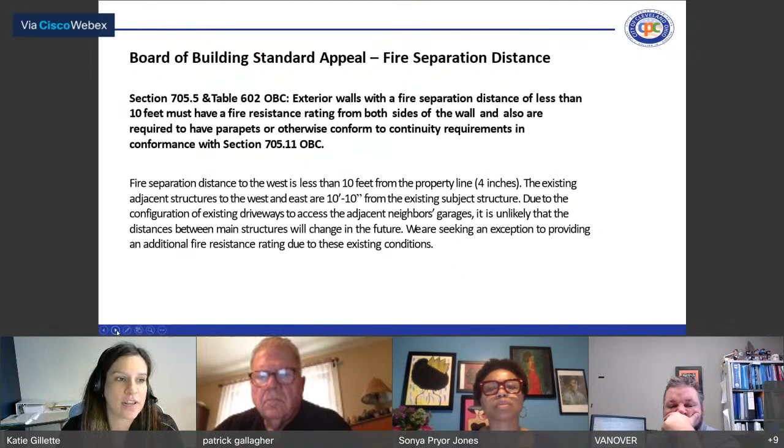Actually, if you go to the next slide, I can speak to it better. The house itself is situated on a lot. All the houses on the street are 35 feet wide by 94 feet deep. The house itself is about 24 feet wide. So on the next slide, you can see there's a near zero lot line condition on the western exposure of the house.

So the code requires a 1 hour fire rated wall. We are seeking to appeal that, to balance the cost of construction for the house itself, knowing that house is about 10 feet 10 inches from the adjacent house, and that condition where that house is situated on the westerly lot is unlikely to change. There's a driveway in between the two homes, so if that house is modified, it's likely to remain in its current configuration, so there would continue to be a separation between the two structures of nearly 11 feet. So those are the two items we are seeking to appeal on.

I know Sonya can speak to some of the community members that have supported this project in the past. So we're happy to answer any questions you may have for us this morning.

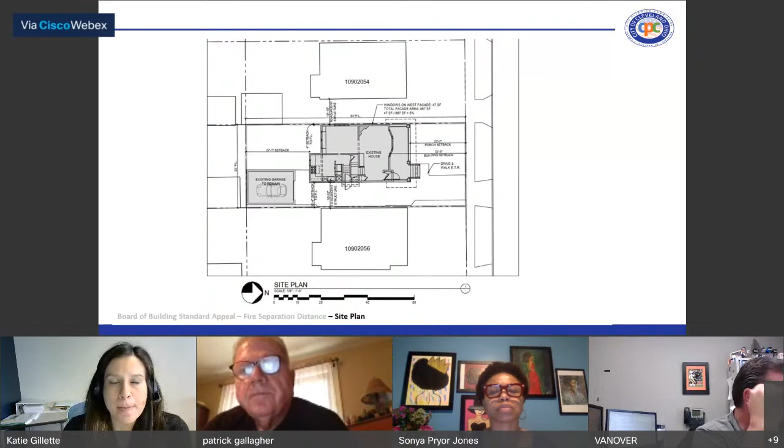Mr. Chairman, if I may, if I can speak to the second variance, aside from just the cost of what it would cost to do that, there's a technical infeasibility argument. This structure is currently constructed where it's currently constructed on the property line would prohibit any openings on that side. I would like to point out, and we've had a considerable conversation regarding this, myself and the plans examiner.

There is no work happening on the walls, the exterior walls, and as Chapter 34 of the Ohio Building Code, 3404 specifically says, to the extent of the alteration it's required to come up to current code, being that there is no alteration of those components, it would not fall in that requirement. However, the change of use is kind of a blanket, like work everywhere at that point. But as we've discussed extensively, the portions above grade are going to remain as if they're a single family residence, so it's no considerable change of use for that portion. And of course, the basement portion is inherently 1 hour rated because it's a masonry wall and it's below grade. So that's one of those conditions where we don't object to that variance. It's not something we can approve on its face.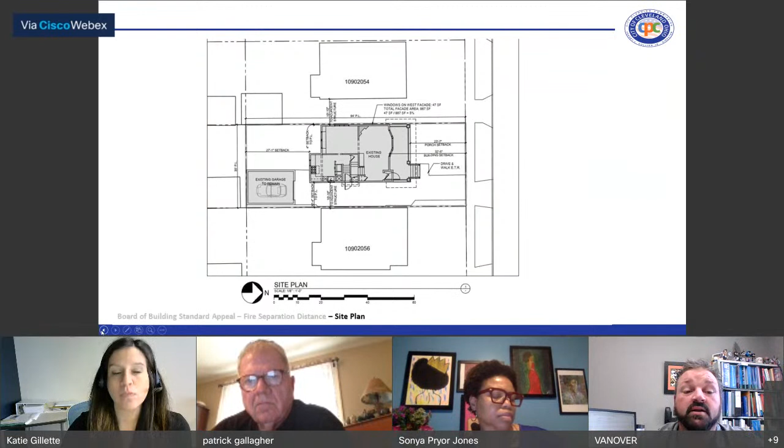This is the first time I specifically have seen this drawing. We would ask that, with the sprinkler, if the variance were to be granted, the sprinklering of the basement would also include the exit stair that gets people from the basement out. At that point, we believe, Mr. Chairman, that the risks have been mitigated.

Does Fire want to comment, or are you guys okay? Commissioner Vanover hit the points right on the head. We're in agreement with the commissioner.

So that's what we have to be able to have a variance for: the basement sprinklered, with the egress stairway out of the basement to be included. And I see you're shaking, yes, you're okay with that, Gillette. Okay, and that the 1 hour separation is good. We're going to go ahead and vary that so that it's acceptable, and that would take care of it.

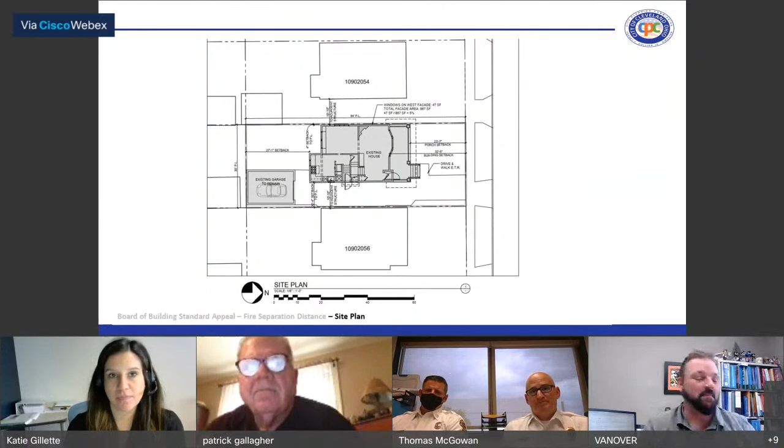Sound good, Mr. Van? Yes, Mr. Chairman, so moved. Okay, all right. Can I get a second on that? Yeah, I'll make the motion, Mr. Chairman. Okay, you make the motion, and I'll have Mr. Ray second that motion.

Bradley, he needs to unmute. In order to unmute, you'll have to hit star 6. And we also had Mr. McGowan with his hand raised again. We were just seconding the motion, before we... Mr. McGowan then. Okay, we're good, Fire's good, Mr. McGowan's good. Seconded, let's get a comment. He's good. Okay, very good.

Okay, call the roll. Mr. Maskey, yes. Mr. Bradley. Mr. Gallagher, yes.

So you will revise the plans to include the limited area sprinkler system, the domestic water line sizing, and include that exit stairwell. Yes, we will. And then this will be adopted in two weeks, and then we can move forward on the application.

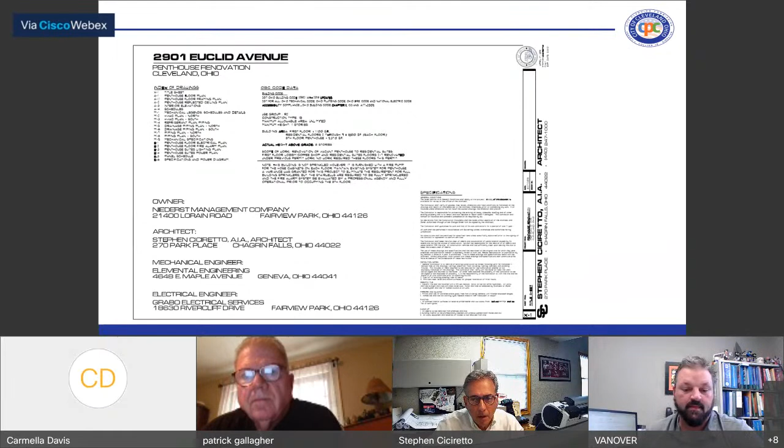This is not revisiting a current resolution and variance. There was a resolution and a variance issued previously on a different project altogether, although that project was, by all intents and purposes, the same project. However, that project was not completed, the permit wasn't issued. So this is a new submission and a new adjudication - just a little bit of housekeeping. It's not like an extension or an alteration. I first read it as an alteration to a previously issued variance, and that is not accurate.

This is a repeated request for the same variance. My question is, though - I have two questions, Mr. Chairman, to the appellant: Has the fire alarm been reviewed and corrected and repaired as was required in 2016?

I believe that monitoring system has been constantly updated, but it hasn't been fully applied with provisions for the 8th floor at this point, because no work was done up there. So the request, Mr. Chairman, the request in 2016 was that a full evaluation by a fire protection or alarm designer be completed of the fire alarm to verify any inadequacies and to correct all the problems that it had in those days. That's my question, not regarding the expansion to the 8th floor.

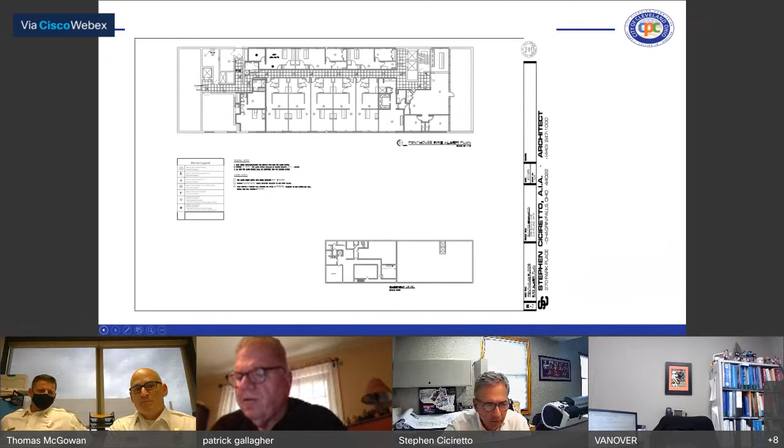Okay, thanks. Fire's good, Mr. Chairman. Okay, fire is good. So with that, we will take a stab at this. If anyone has, unless somebody else has another comment, we're going to uphold the adjudication order as being properly issued, and that the requirement for the variance is that just the top floor, the new, is going to be sprinkled, and the egress out of the building all the way out from top to bottom is to be sprinkled, and that upgrade to that fire alarm system needs to occur also. I guess that's it.

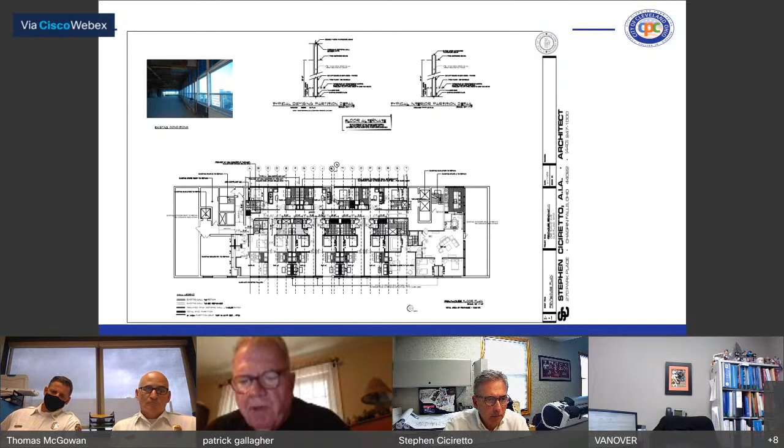Okay, go ahead. I believe, I thought I heard Mr. Vanover state that as the areas were upgraded, they would also be sprinklered. Does that need to be stated, Mr. Vanover, or is that stated in the variance motion? It does. No, it does need to be stated in the resolution that all the other areas, everybody's on board with that, that any other new work that goes on in any of those areas will need fire alarms, the sprinkler system added to them.